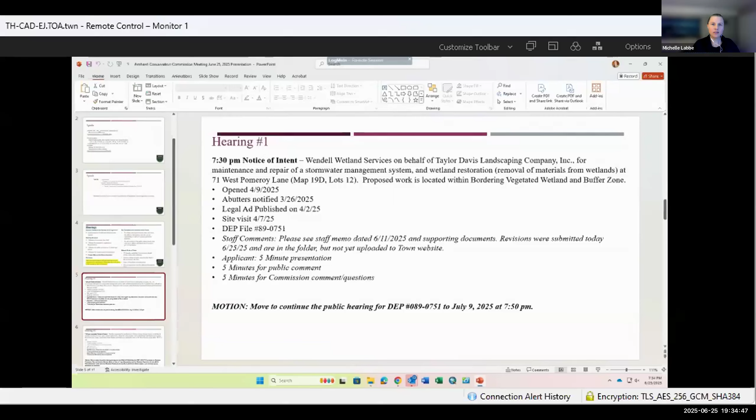Rachel on the motion, Bruce on the second. Andre, aye. Alex, aye. Rachel, aye. Bruce, aye. And I'm an aye. Okay, next up. We're a minute early. Oh, there we go.

Amended notice of intent for PureSky requesting the installation of a battery energy storage system, trenching for auxiliary electrical service, and a culvert replacement. Proposed work includes work in bordering land subject to flooding, riverfront area, bank, land under water bodies and waterways, and buffer zone at 191 West Pomeroy Lane, map 19D and lot 10.

Good evening, Tom. Good evening. Is Madam Chair. Lawrence here with us tonight? Lawrence is here. Okay, great. Yeah. All right, Erin, would you mind giving us an update?

Sure. So we received a letter from an LSP that had been requested by Rachel. And there was some additional information submitted to us as well. And why am I drawing a blank on what it is? NHESP. Thank you. NHESP approval also came through.

So I drafted an order of conditions, which is in the public folder and also in the commission folder, and sort of tried to... The first condition that I added was a condition relative to the CMP, which I had been requesting some reports on the turtle monitoring relative to the CMP. So it's basically just so that I can establish that that's been complied with.

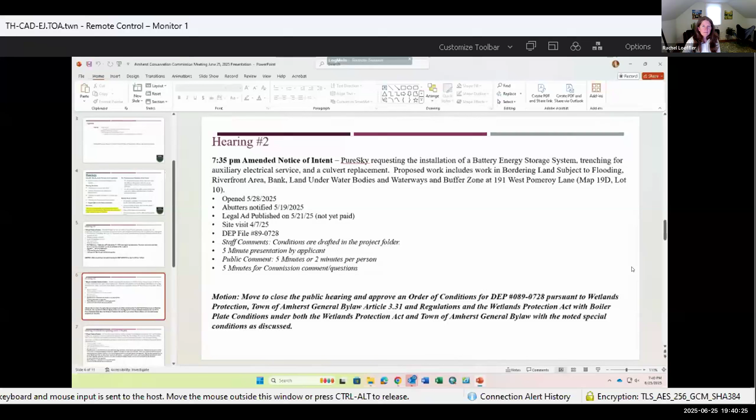Rachel, aye. Alex, aye. Andre, aye. Bruce, aye. And I'm an aye. All right, thank you very much.

Just one question for Erin. The pre-construction meeting, do you want one for each individual amendment, or one that covers all the things at the same time? I'd like one for the trenching and the culvert preferably, but I'm open if you want to separate them into two if timing wise that's preferred.

Okay, thank you. Thanks for working with us, guys. Good night, always a pleasure. Bye, night. Okay, next up, 7:40.

Wow, we're on time. Notice of intent for GZA Geo Environmental Incorporated on behalf of Archipelago Investments LLC and Hampshire College for a proposed mixed-use residential development at 0 West Bay Road, map 25B, lot 52, and 0 West Street, map 25B, lot 58. Proposed work includes construction of 3 mixed-use residential structures with associated parking, stormwater remediation, and landscaping, portions of which are located within buffer zones to bordering vegetated wetlands. DEP number 089-0752. Bruce.

My version says hold on opening until 7:50. Not sure why, but that's what it says. Oh yeah, the applicant had a conflict, and I see his representative is here, but Kyle was not able to be here until at least 7:50. Okay, so I figured we had 2 hearings, we'll probably be fine, but we burned through those pretty quick. All right, I'll have to read that one again, I guess.

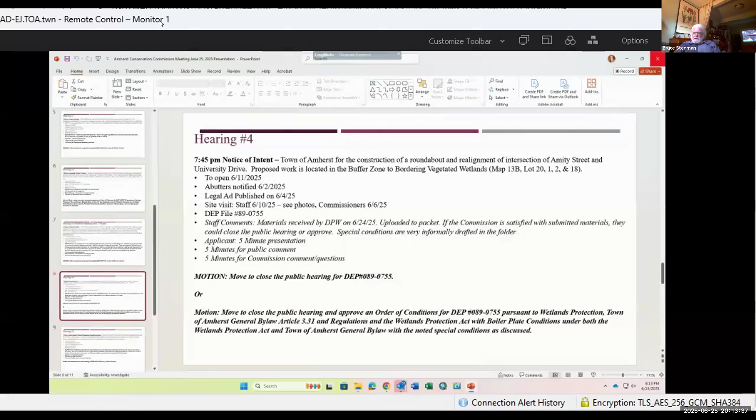I'll read it, I got it. I move to close the public hearing and approve an order of conditions for DEP number 089-0755 pursuant to Wetlands Protection Town of Amherst General Bylaw, Article 3.31 and regulations, and the Wetlands Protection Act with boilerplate conditions under both the Wetlands Protection Act and the Town of Amherst General Bylaw with the noted special conditions as discussed. Second.

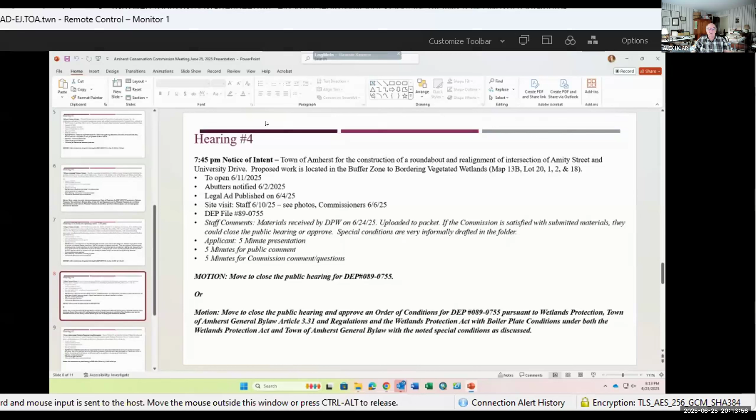Bruce on the motion, Alex on the second. Bruce, aye. Rachel, no, sorry. Alex, aye. Andre, abstain. Okay.

I think I'm in favor of more information about the Stormceptor. Given that we had a late submission and there are people that didn't have enough time to look at it, and we have some remaining questions, that's what I'd like to see. So I'm a no. So we don't have a quorum to move forward.

So under the circumstances, I just want to make sure Beth has really clear direction of what the commission will need in order to move forward at the next meeting. One thing that I hope might bridge the gap is to get a signed letter from Jason that asserts the improved stormwater benefits at the roundabout. And maybe if that data from the hydrodynamic separator is available, that might also help.

But if we're not approving tonight, and there was no vote to close the public hearing, then I think we're going to have a motion to continue in order to allow Beth to get the additional items the commission's looking for. I have an 8:05 slot on July 9th if somebody wants to make a motion to continue. Is there anything else from commissioners we want to relay to Beth before we make that motion? Okay, seeing none, we'll go with Erin's list and July 9th, a motion to continue.

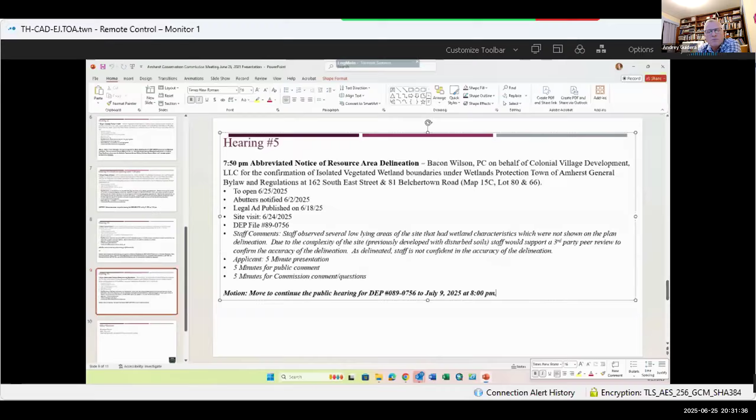Thanks. Thank you. Okay, so we're back to GZA, for the third time. Notice of intent for GZA Geo-Environmental Incorporated on behalf of Archipelago Investments LLC. Wait, before I do this, Erin, is Kyle here?

Yes. GZA Geo-Environmental on behalf of Archipelago Investments LLC and Hampshire College for proposed mixed-use residential development at 0 West Bay Road, map 25B lot 52, and 0 West Street, map 25B lot 58. Proposed work includes construction of 3 mixed-use residential structures with associated parking, stormwater remediation, and landscaping, portions of which are located within the buffer zones to bordering vegetated wetlands, DEP number 0890752.

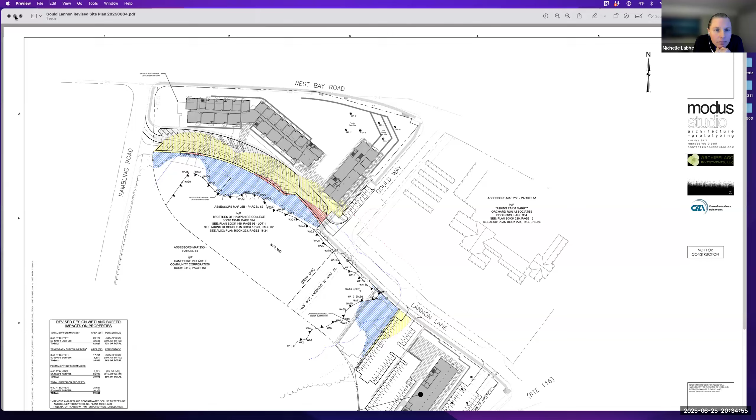This was the plan we discussed at the last meeting. This was our proposed iteration to try to think about moving the woonerf further away from the wetland while keeping the 3 building setup. We appreciated the comments and feedback and have been working hard to come up with an option we think might allow this very important project to move forward.

I'd like to show it to you. Let's see here. That is not what I was looking for. Sorry about that. I believe this one. Here we are.

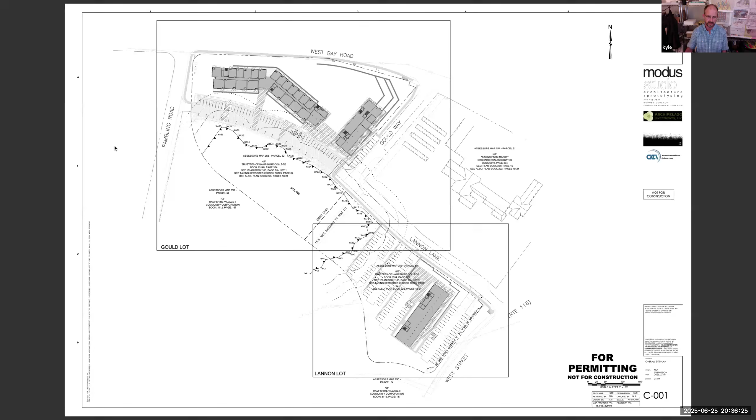Okay, so I'll start over. This was the original plan that we submitted, right? This shows the 3 buildings and the Woonerf adjacent to the wetlands and the parking next to the buffer on Lannon Lane.

This is what we showed last week, which showed the Woonerf moving away from the buffer and began the conversation of remediation, mitigation, and what we'd be doing in 0 to 50 and in 50 to 100. We took your feedback and have been working.

This is just process stuff, but I wanted to show you that we're really trying to come up with something that would allow us to develop the site, allow Hampshire to realize the value for this site, and bring as much housing as we can to this important parcel.

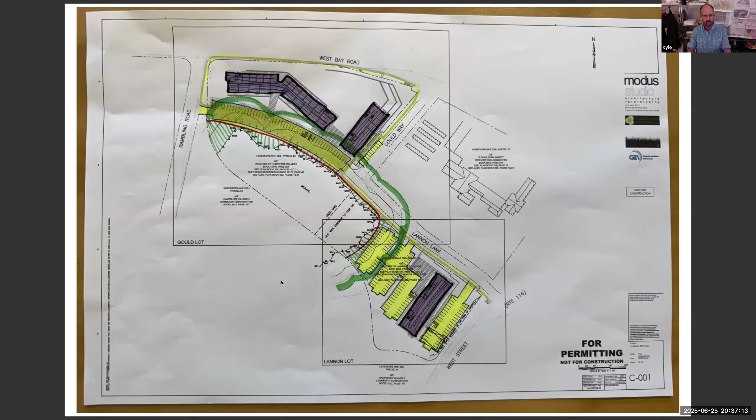So what we're looking at here is just some quick sketches I want to show you through. This is the existing plan. The red is the fence, the dark green is the 100-foot buffer, the highlighter yellow is all the parking and walkways, and the scribbled pink are the buildings.

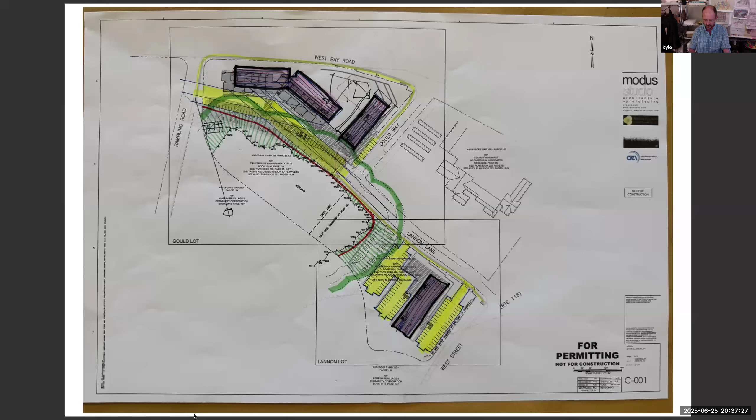Here's a quick sketch showing how if the Woonerf starts to move away from the wetland, if building 1 starts to move away from the Woonerf, what starts to happen to some of the amenity spaces for tenants. This is another iteration where the 3 building scheme started to look like a 2 building scheme, with my scribbles and notes on here.

So, but this is us working through how we could start to come up with something that we think might balance all the competing objectives that are on the site.

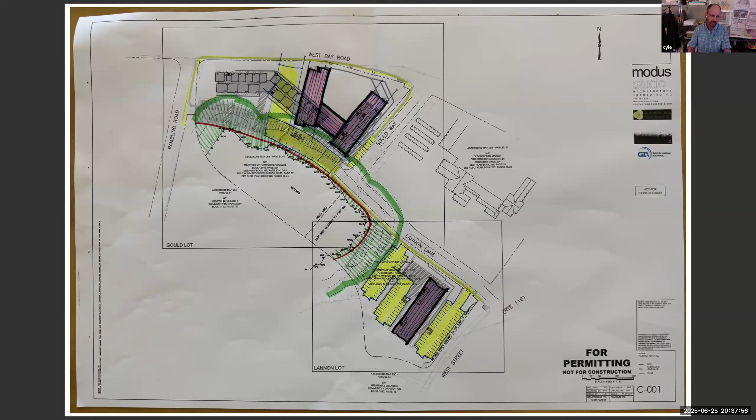This was a crazy idea to think about a U-shaped building that would allow for just a portion of that 0 to 50-foot buffer to be impacted, and then turn the parking. Doesn't work with grade, doesn't work in a lot of ways.

This was another scheme where we started to push the buildings out to the corner, try to do a zig and zag on the Woonerf to reduce the amount of impact to the buffer. We also tried to move the parking on the Lannon side off, out of the buffer as well.

Another one where, again, a zig and zag on the Woonerf. This 2 buildings turned into a T-shaped building, again trying to preserve the limited space we have available where we can actually put in underground stormwater that would work.

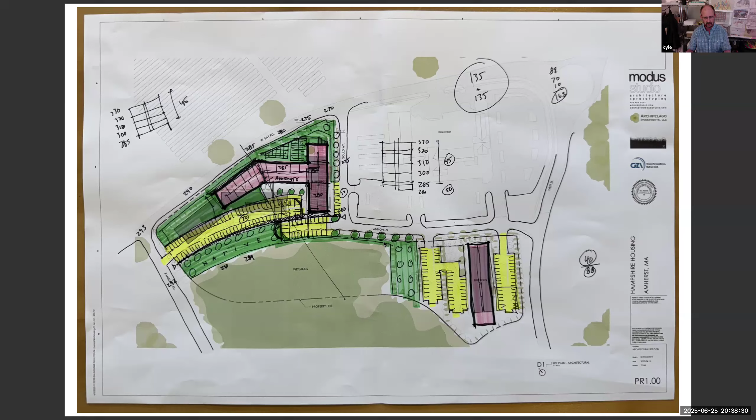And then we started to look at a single building that was effectively on or near the 75-foot no-build around the wetland, the buffer, parking at the corner of Bay and Gould, and then a single building against the buffer on the Lannon side with parking to the east.

Here's another iteration where it becomes a little bit more curved, looking at different parking options, starting to think of the 0 to 50-foot buffer a little differently than the 50 to 100-foot buffer based on some of our conversations last week.

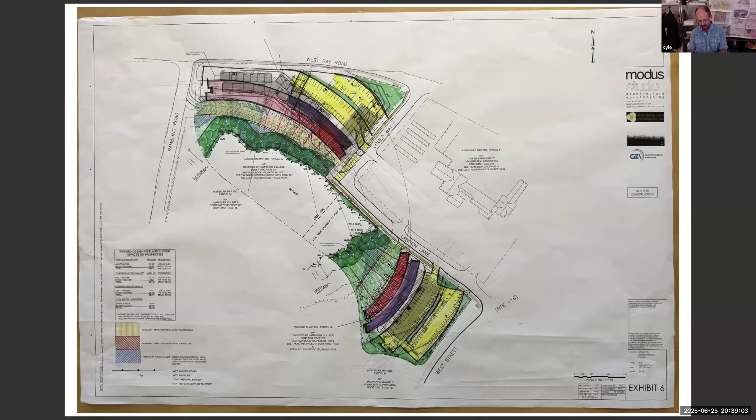I'll get through this quick, just a couple sketches, again thinking about how we could start to deal with all the competing objectives of the hammerhead, fire department access, planning board requirements, and soil remediation, et cetera. And then some sketches on how this could start to work out if we're heading in this direction.

And then this is a more refined set that starts to show these 2 curved buildings, a robust planted 0 to 50-foot buffer, a fence along the wetland, and then pushing the amenity space into the 50 to 100-foot buffer and getting rid of the Woonerf.

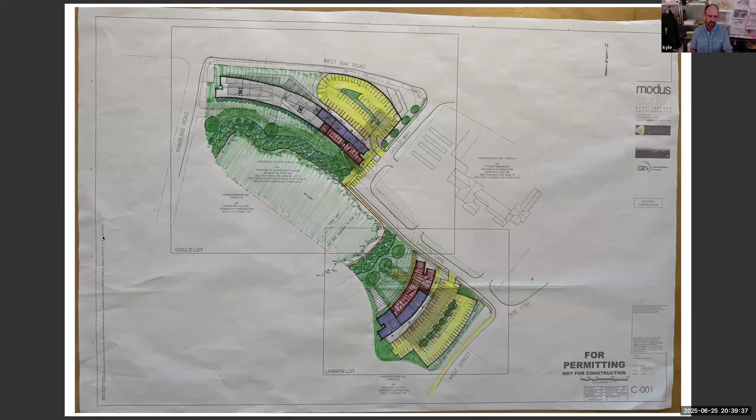Here's some additional sketches to look at other options on how the grades work. We have a big long building. If we take those 2 buildings and make them into one, we still have 280 feet height on the Gould and Lannon side, and 292.

Going back to the ground floor, what we're looking to do is stay outside of the 0 to 50-foot buffer, curve the building so we have enough room for parking along Gould and Bay, and push the building on Lannon closer to the buffer with parking along West Street. As you can see, this results in fewer units. It's not at the 200 we were looking for, the 188 or the 140 we've submitted - it's down now below 130.